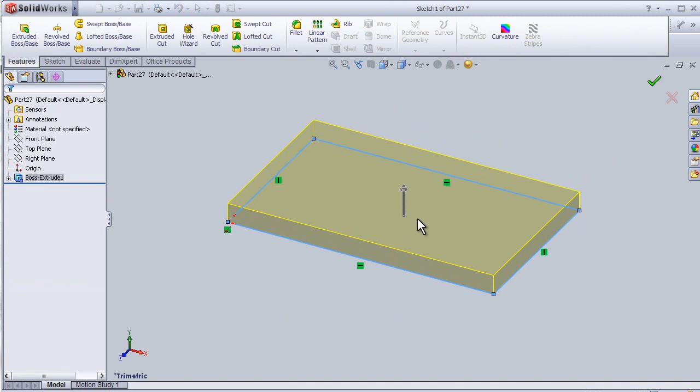So let's start with some sketch, the top plane. Extrude it. Okay, so now let's make a hole on this plate.

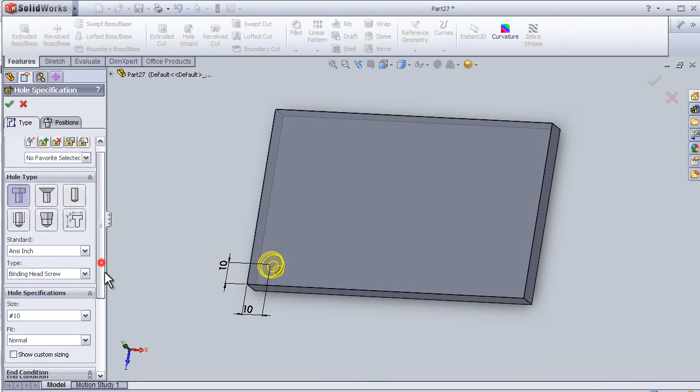So let's make it through all, and okay.

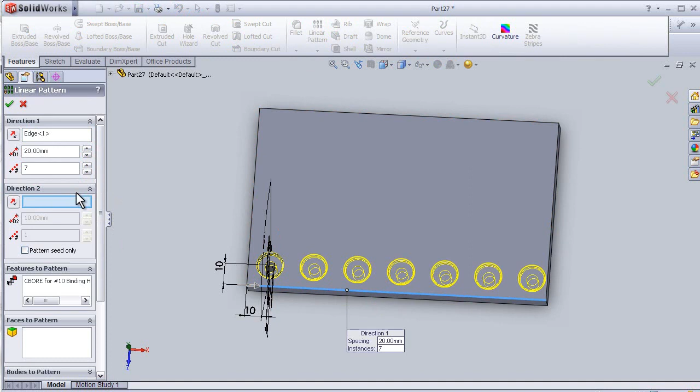And now let's repeat this hole with linear pattern. We have the direction, this line, number of holes 7, and distance to be 20 millimeter. Okay.

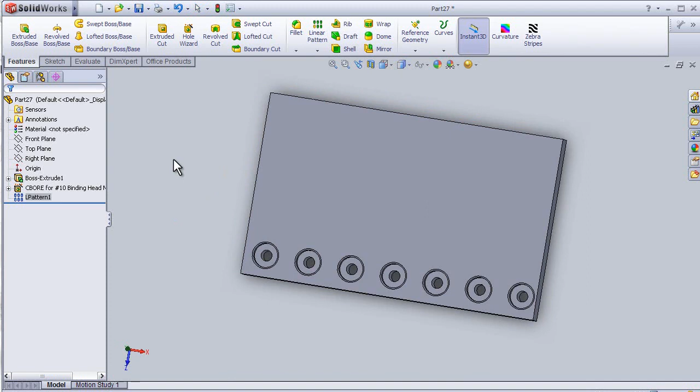So now I want to save some time, so I can mirror these holes into the other side by using the mirror tool. So that means I need a plane or a mirror that will mirror these holes into the other side.

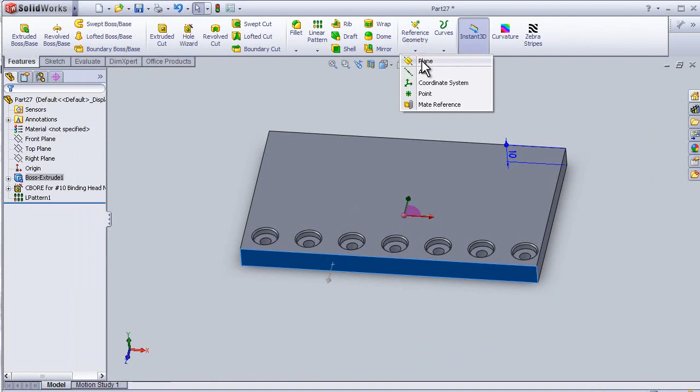So let's find a plane, so we can insert a plane in the middle of this plate to be parallel to this plane. So let's insert a reference plane. Let's flip direction. So we have almost a plane in the middle of this plate.

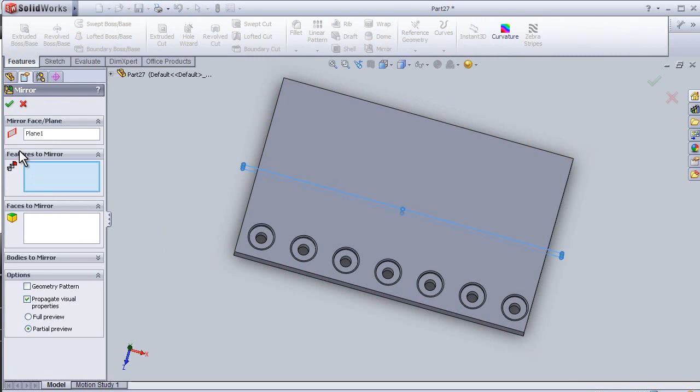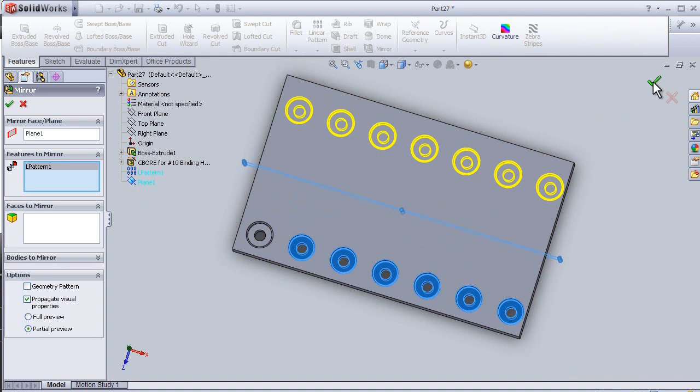So let's press OK, and now let's activate the mirror tool. We have the plane which is going to be the mirror already selected, and the features to mirror will be the pattern here. As we see, SolidWorks reflected these holes into the other side. I can press OK.

So it is a saving time tool.

So after this tutorial about the mirror feature, we already covered all the tools in the feature toolbar, and it will be the last tutorial in this topic. I'm going to prepare another set of tutorials covering the sketch functions and tools, and later on there will be a set of tutorials on e-drawing. All these tutorials are for the beginner user, and later on there will be more advanced tutorials. So thank you for watching, and see you in the other tutorial.